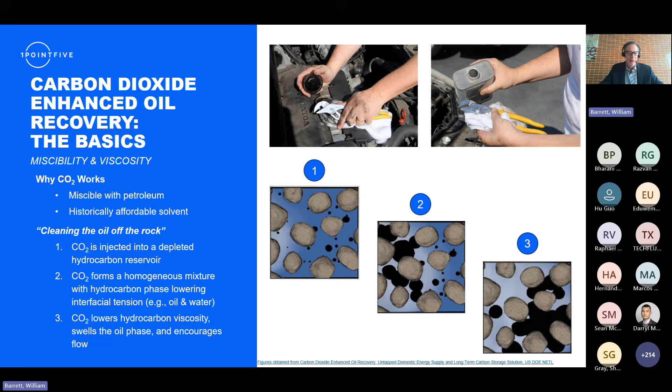It becomes miscible with the oil. It swells the oil. It allows the viscosity to be lower, and it actually flows. So now the oil that was trapped becomes mobile. And that's the slide here. So these are the four trapping mechanisms when you put CO2 into a geologic formation.

So the one that you'll always need to have there is a stratigraphic trap. Even though we inject CO2 in a fluid, not a gaseous state, it's buoyant, so it wants to rise, similar to the oil and gas. And so the oil and gas has been trapped millions of years. It's always because there is a seal there. And in this case, it's the cap rock that's impermeable. The CO2, the oil, the water, nothing flows through it. It's basically like a granite.

There's residual trapping as another mechanism. So the CO2, because of the wettability, is a new phase that's introduced into the rock; it's not been there before. And I will say, it's not injected into a cavern, right? It's injected into tiny pore spaces in a sandstone rock or a limestone rock that if you look at it, you would say there's nothing there, but it's actually like a microscopic sponge. And that's what we're trying to get the oil out of. So you have the residual trapping there.

You have solubility trapping because there's brine naturally in these formations. And so some of the CO2 will dissolve into the brine that's there. And the last trapping mechanism is mineralization. So over time, the CO2 actually becomes part of the rock. It becomes a carbonate. All of these are permanent and they all act no matter what situation you put the CO2 into a geologic formation. Those four are always there.

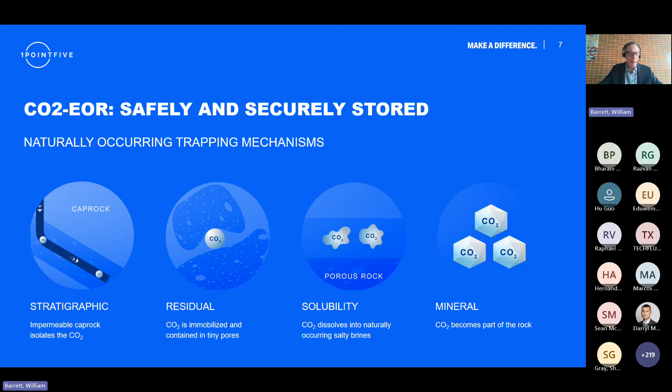The process overview, and I am looking to make sure I keep an eye on my time here because I could talk about this all day long.

But anyway, the CO2 is a closed loop system, right? We take this biogenic, atmospheric or anthropogenic CO2 and put it into the reservoir where it goes down an injection well, and this is the rock formation where it then travels through the formation and acts on the trapped oil that's there. It releases the trapped oil. In turn, the CO2 gets trapped in its place, and then we get the production. So we produce this fluid.

Now, generally, in dolomite carbonate formations, we will see that on the first trip through the reservoir, 60% of that CO2 will be produced again with the oil. And so 40% remains sequestered the very first trip through the reservoir. We then recycle that. So we separate the oil, gas, and the water. The oil goes to sales. The water goes back into the reservoir.

The gas then is separated because now we have the natural gas and the CO2 combined together. So we separate those out. The natural gas goes to sales, and the CO2 gets recycled as 60%. Now, the next trip through the reservoir, another 40% of that is sequestered. So each day we have to make up 40% of what we put in there. So as you can see, after a couple of trips through the reservoir, you've got 100% sequestration.

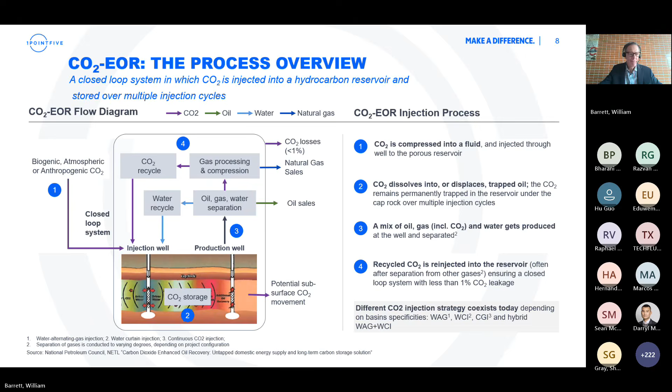Now, the history of CO₂-EOR in the United States: as I mentioned, this is not a new technology. The first patent for CO₂-EOR was granted in 1952, and according to the Texas Railroad Commission, between 1958 and 1962 were the very first enhanced oil recovery projects in the United States and Oklahoma. Now those were a lot of test cases, right? They were trying to make the technology viable. And so since then, it's been very well perfected.

So the first commercial project was in West Texas in Scurry County, and the field is called the Scurry Area Canyon Reef Operators Committee, or SACROC. And you can find a lot of information on this field in the literature.

The very first economic CO₂-EOR project. Now, after the oil embargo of 1973, there was more emphasis on domestic oil production, and so enhanced oil recovery then became more prominent. And so now, as of 2023, a couple of years back, there were 139 CO₂-EOR projects in the United States, producing 241,000 barrels of oil a day, injecting 2 BCF of CO₂ each day.

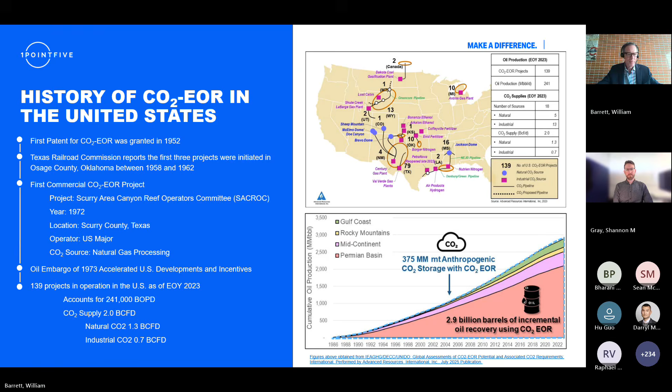Now, last thing I'll do here is talk about a little case study. And this is Oxy's operated Wasson Denver unit. Now, it's the Wasson field, and it's made up of several units. So the field roughly includes all of these units, and the Denver unit is the one that I'll talk about. It was discovered in 1936, and water flooding, which is an improved oil recovery mechanism where we pump additional water into the field to repressurize it, was started in 1960. And the CO₂-EOR injection, enhanced oil recovery, started in 1983, and it's still going on today in this field.

So the estimated amount of CO₂ that has been sequestered to date since 1983 is 775 million metric tons. We, back in 2015, were able to get the very first EPA, the U.S. Environmental Protection Agency's MRV plan, the Monitoring, Reporting and Verification Plan, approved. So that was the very first one in the United States, and it was for the Denver unit. The second one was also for one of our units in Hobbs, New Mexico. So we report annually under the greenhouse gas reporting, subpart RR.

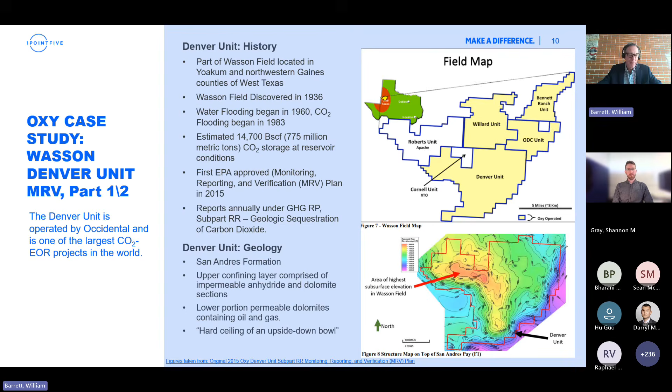So this just shows you the Denver unit's MRV performance. We started with one MRV for the Denver unit and expanded it to some of the other fields that are here. You see the Willard, the ODC unit, the Wasson ODC and the Bennett Ranch. So we expanded that MRV to include all of those. And the maximum storage space is 1,325 million metric tons in these fields. So you can see that it's a sizable amount of CO₂ sequestration potential there.

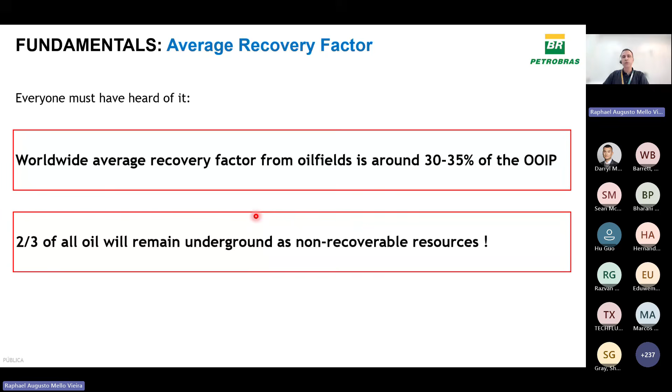So probably everyone must have heard about it. We cannot extract all the oil that we have on the ground. In fact, the average recovery factor, worldwide speaking, is something in between 30-35% of the original oil in place that we have, which means that 2/3 of all the oil will remain there as non-recoverable resources, right? We have many reasons for that, reasons related to the engineering design of the exploitation plan. For example, the number of wells that we can drill economically, the well spacing, well type, well location.

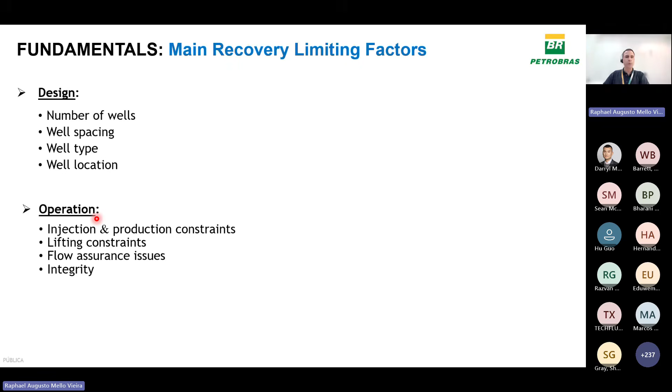We have another set of reasons related to the way we operate the fields, right? For example, how much water can we inject to push the oil towards the producers, as well as how much water can we produce and treat and overboard, right? And we have some causes related to nature. For example, rock heterogeneity. If the reservoir rock is more heterogeneous, it's harder to produce oil, right?

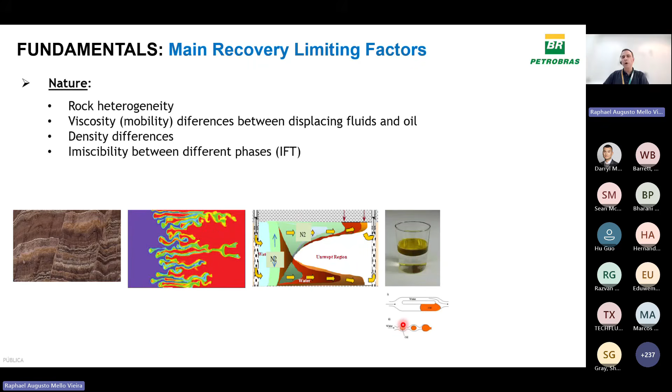If we have big viscosity differences between the oil itself and the fluids that we use to push this oil towards the producers, for example, water or gas, it's also harder to extract the oil. Density differences also have an impact. Immiscibility between phases is another natural cause, very important for us, because it is one of the main causes of oil retention in rock pores, right? And keep this one in mind because it's very important for CO₂-EOR, as William just presented.

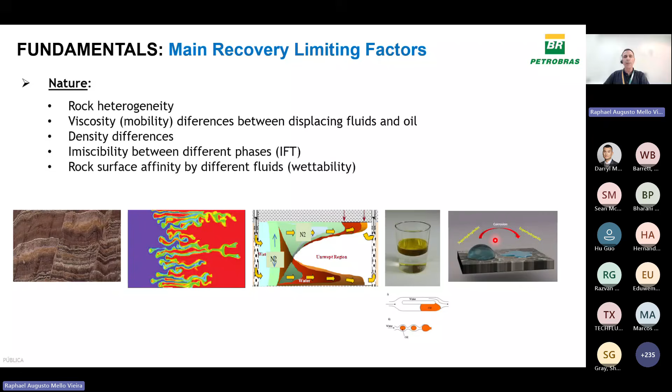And the last one is rock surface affinity by different fluids, what we technically call wettability. So if, for example, the rock surface has a greater affinity for oil, it's oil wetted, it's harder to extract the oil. We have some technologies to try to overcome these recovery limitations. We have the enhanced oil recovery technologies. These are special methods that we use to modify the physical chemistry of fluids and rocks to increase recovery at field scale, right? We are talking about field-wide methods here.

And we have the IOR, the improved oil recovery. That is a broader definition that encompasses not only EOR technologies, but everything else that we can do for recovery increase. For example, simply drilling more wells, something that we call infill drilling, is considered IOR. A special reservoir characterization, for example, using special seismic or tracer campaigns, is also considered IOR.

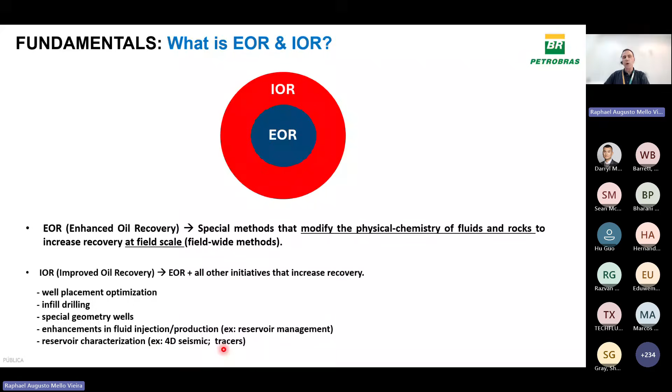Implementing EOR in a field is not something easy, right? Because these technologies are more complex, they are more uncertain, we have additional costs, they have longer payback times, longer qualification times. They compete with other technologies that don't offer the same benefit, but they are easier to implement, so they are the low-hanging fruits. And this bunch of technologies is more sensitive to risk and oil price.

It's even more challenging if you want to go offshore, especially ultra-deep offshore, because there we have larger reservoirs. So for example, if we are dealing with chemical EOR, we need to bring there a lot of products, a lot of chemicals, and it's not easy. They are offshore fields. We have fewer wells, we have irregular patterns, longer response times. It's harder to adapt the platforms to receive those EOR fluids that we inject, as well as the equipment that we need to do that. So we have retrofitting limitations on the platforms.

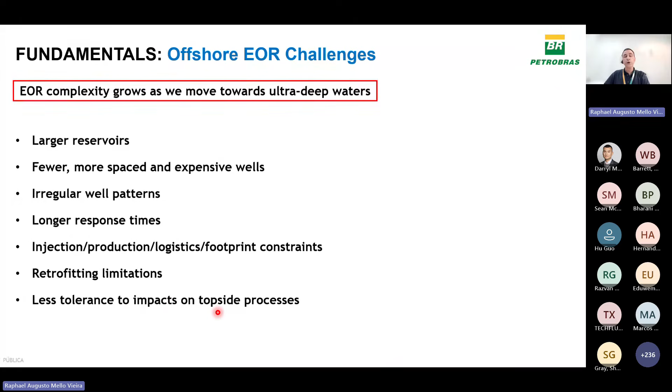And we are less tolerant to impacts on topside processes. For example, if I inject something that, when we produce it, is going to harm our oil-water separation process or even the water treatment process and overboarding, it's a problem. So it's key, if I want to implement EOR offshore, to think about it in advance.

We have many EOR methods. If we look carefully, each one tries to attack one of the natural causes that I just mentioned. For example, if I put polymer in the water that I inject, trying to viscosify this water, what I'm trying to do is to approximate oil viscosity and water viscosity, right? But here today, we are interested in gas-based EOR, especially CO2 EOR, and what we are trying to do is to attack that immiscibility that I just mentioned, because as William told us, gases, especially CO2 at very high pressure, become miscible with oil. So I eliminate those causes of oil trapping.

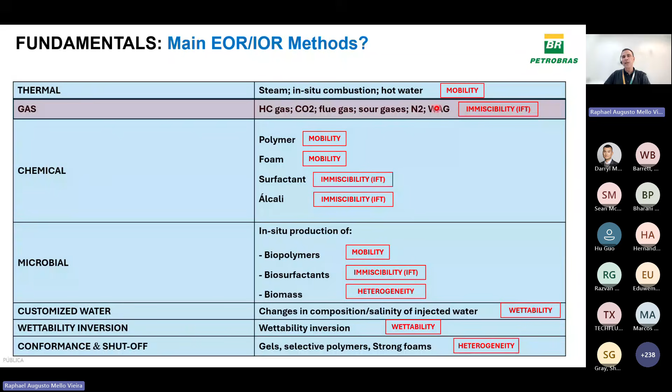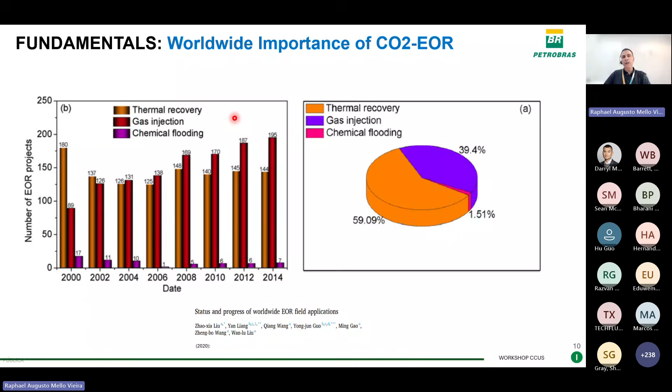CO2 EOR is very important. Historically, it is the second most applied EOR technology, just loses to thermal EOR, which means that for us, oil companies, especially in the upstream business, the U from CCUS, the utilization, means CO2 EOR. And since the 70s, the 50s, right? For a long time, we know how it works and we apply it.

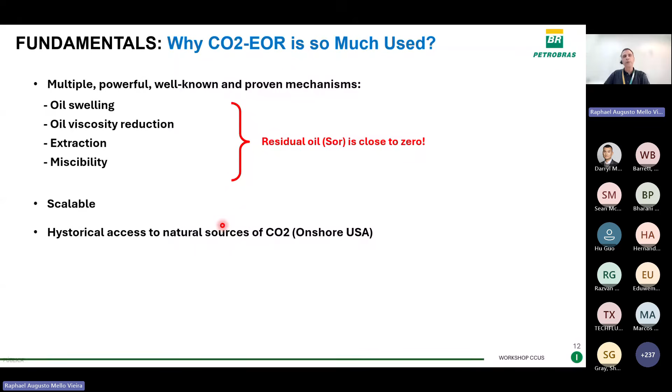Reasons for using CO2 EOR that much. First, we have multiple powerful and well-known mechanisms. These mechanisms, oil swelling, viscosity reduction, extraction, miscibility, can reduce SOR, that is residual oil saturation, the oil that becomes trapped in the rock pores, to almost zero, where gas effectively can contact this oil. It's something scalable as far as we have access to the gas, to the CO2. And historically, we have had access to these sources of CO2, especially onshore USA, as William showed us. We have natural sources of CO2. So that's one reason for the great use of CO2, worldwide speaking.

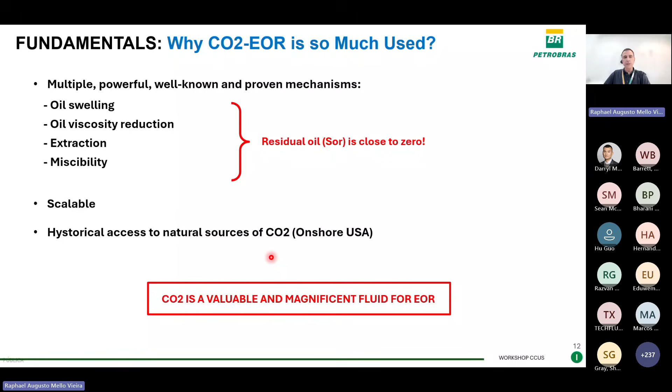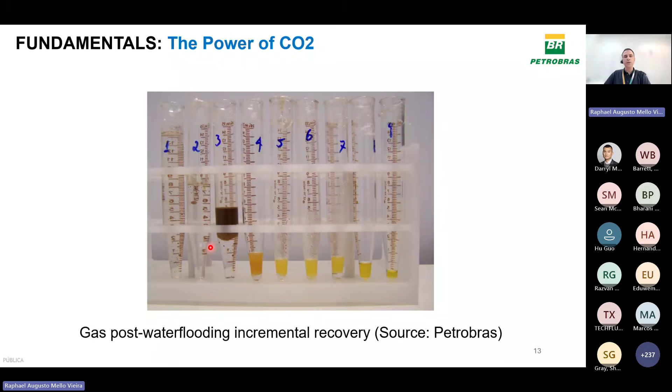So one important message here: CO2 for us, from the recovery point of view, is not a problem, it's a solution. It's a valuable and magnificent fluid for EOR. We can have an impression about the power of CO2 if we perform very simple lab experiments. For example, in this one, we had a piece of rock fully saturated with oil, and we injected water up to ceasing the oil production. So in these first test tubes, we see that we injected water and it produced just water, right? We just circulated water here. We were not producing oil anymore. As soon as we started injecting CO2, the oil started to show up again by all those mechanisms that I mentioned.

But life is not a bed of roses. We have issues too. And the main one is related to gas's very high mobility in the rocks, right? Gases, even at high pressures, have very low viscosity. So they tend to pass through the most permeable pores of the rock. That's what we see in this micromodel experiment performed by Heriot-Watt University. Here we see the CO2 bubbles flowing very quickly through the most permeable pores, leaving a lot of oil behind, right? So gas can extract all the oil where it contacts this oil, but it doesn't sweep the rock very well. We have ways to overcome this issue.

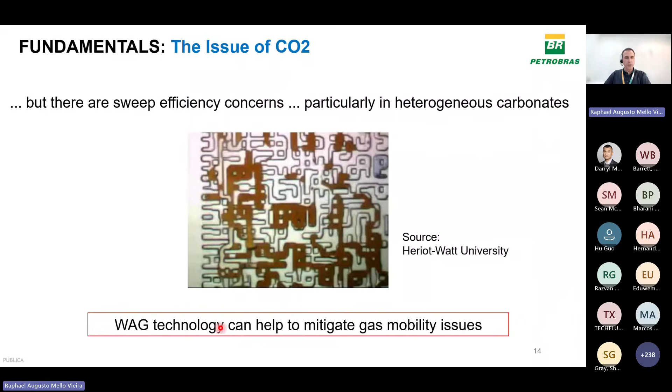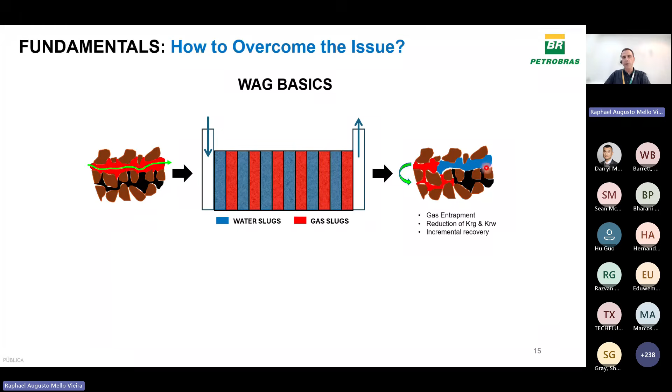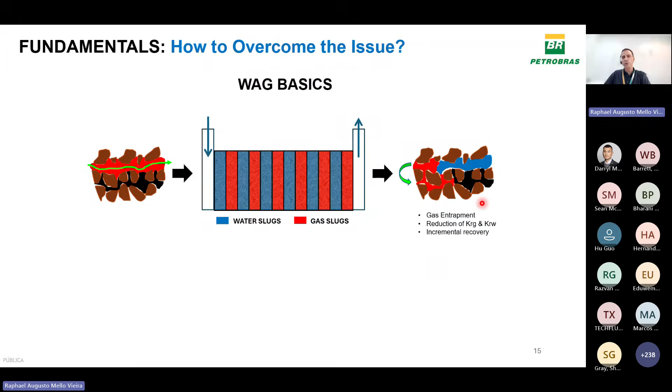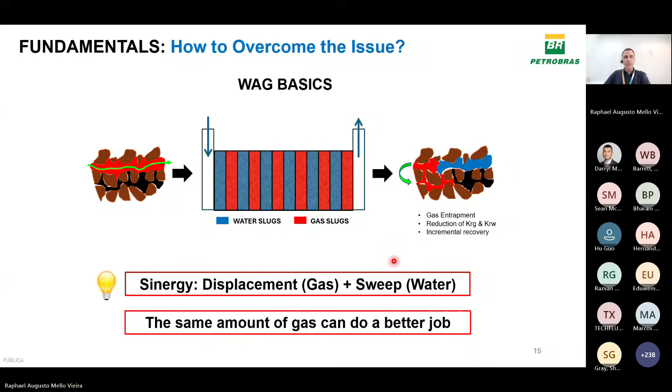One of the ways is to implement WAG technology. WAG means water alternating gas. What happens is when I alternate water cycles with gas cycles, this water blocks the preferential pores where gas was passing through, causing gas diversion and the production of oil from these adjacent pores. So simultaneously to increasing the oil production, we also have gas entrapment, right? So here, by performing WAG, I have a synergy between the better displacement efficiency of gas and the better sweep efficiency of water. In other words, the same amount of gas can do a better job.

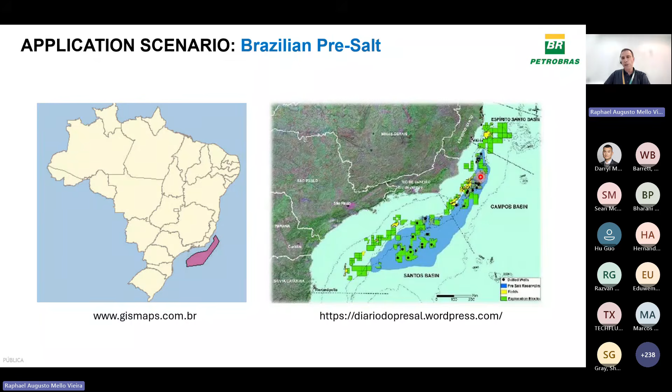Now talking a little bit about the application scenario here in Brazil for CO2-EOR. It's the pre-salt basin, located in southeast Brazil. There we have some big and giant fields. They are carbonate rock fields that possess light oils and a huge associated gas content. We have a lot of gas dissolved in this oil. And one particularity, this gas is contaminated with CO2. Contamination can range from a few percent up to 45% molar of CO2 in this gas.

Petrobras and its partners, since the beginning, decided not to vent the CO2 into the atmosphere. We decided to reinject this gas. By doing so, we could join environmental compliance with improved gas management and EOR. Gas, as I told you, is a very good extractor for oil, a very good solvent for oil, let's say. And here we have favorable conditions for gas injection. For example, we have high pressures, we are talking about 6,000, 7,000, 8,000 psi, low temperatures from 60 to 90 Celsius, light oils and CO2. So we have favorable conditions for miscibility.

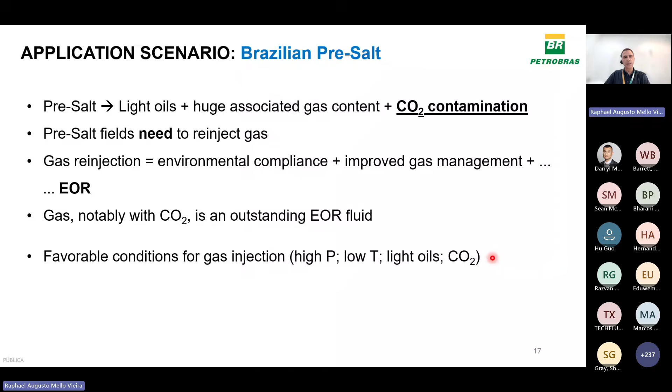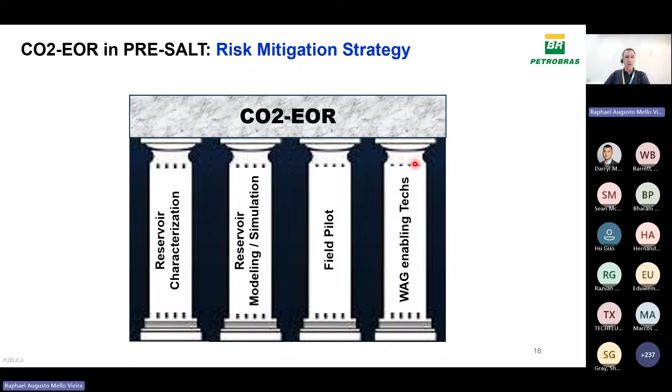CO₂-EOR is not something new, as William told us, but it's not very usual to do that in an offshore environment, especially ultra deep offshore, right? So we had risks involving this application. To mitigate those risks, we tried to implement a risk mitigation strategy based on 4 pillars: reservoir characterization, reservoir modeling and simulation, a field pilot, and the development or adoption of some WAG enabling techs.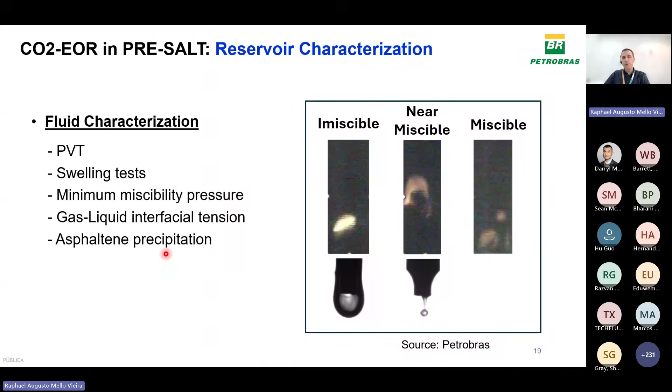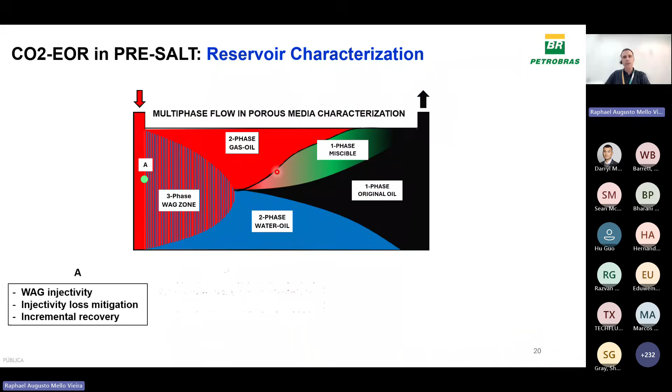Regarding characterization, we performed a very broad fluid characterization program involving not just the standard PVT tests, but also some special tests related to CO₂-EOR: swelling tests, minimum miscibility pressure tests, interfacial tension tests, and asphaltene precipitation evaluations, right? We also performed a broad multi-phase flow in porous media characterization, investigating those zones that are not usually investigated in normal waterfloodings. So we investigated experimentally the WAG three-phase zone, the two-phase gas-oil zone, the miscible zone, right?

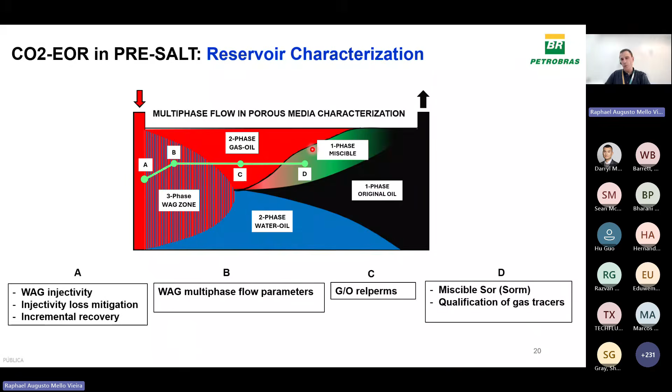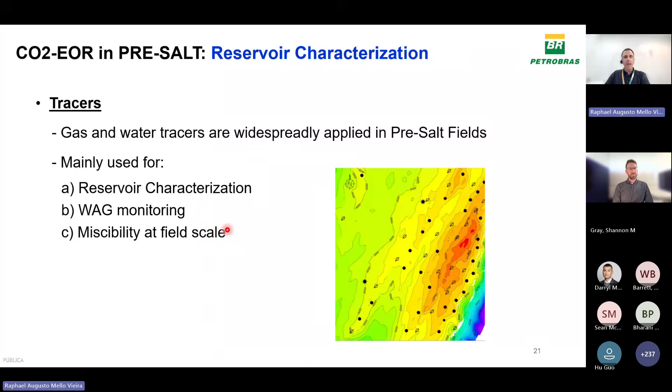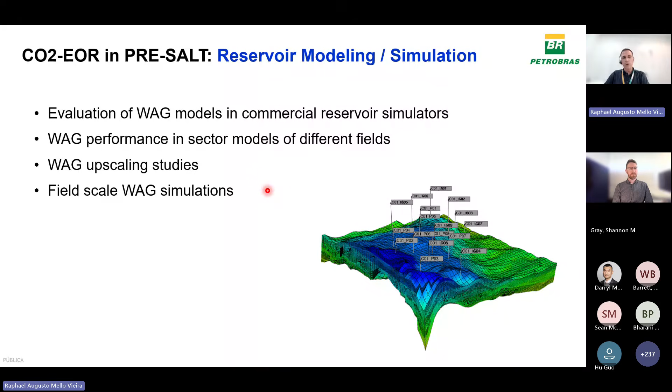In the field, we implemented a very broad tracing characterization program involving gas and water tracers, mainly to better characterize the reservoir, to monitor WAG cycles, and to detect miscibility at field scale, right? In terms of reservoir modeling, we started evaluating the models that we have available in commercial simulators to see if they fitted the phenomena that we wanted to represent. Then we started performing some evaluations in sector models, upscaled the parameters, and finally performed the field scale WAG simulations.

In terms of enabling technologies, those technologies that we need to bring that application to the field in reality, we adopted or developed CO2 separation by membranes, gas drying by molecular sieves, adopted intelligent completion in order to inject the gas where we wanted to. We installed simultaneous gas and water manifolds in the field, which brings a lot of flexibility.

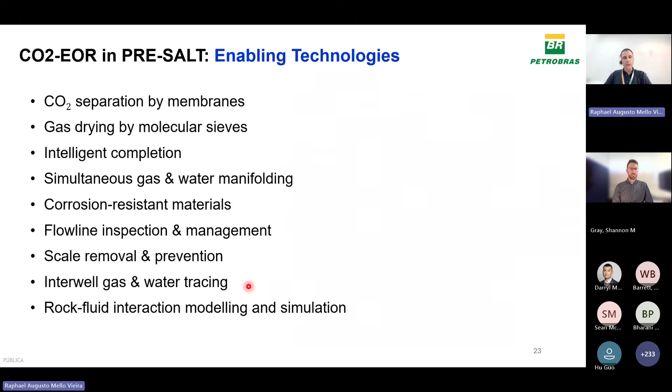We studied the corrosion and adopted corrosion-resistant materials, adopted a flow line inspection and management procedure, because here we have a problem that we call stress corrosion cracking. You probably know that CO2 in contact with water is acidic, so we have corrosion issues. Scale removal and prevention, because carbonate rocks are more reactive, especially when we have CO2 and water. So we need to adopt scale removal and prevention procedures. The gas tracing and water tracing that I just mentioned, and rock-fluid interaction modeling and simulation.

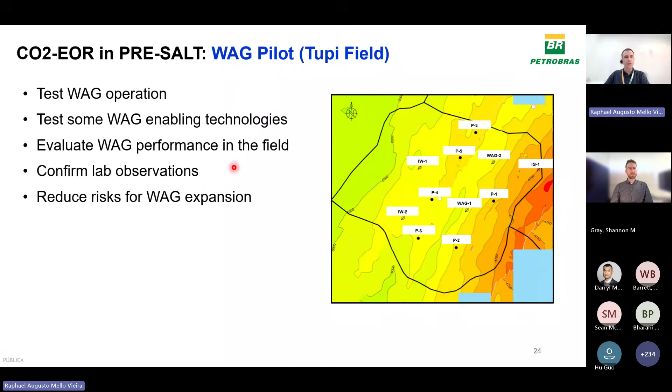Regarding the pilot, it was done in Tupi field here in pre-salt, mainly to test the WAG operation, the cycling, if we would have some problem, test some WAG enabling technologies, evaluate the performance in the field, confirm some lab observations, and reduce risks for expansion. The results were good in such a way that now we have expanded CO₂-EOR and WAG to 10 fields here in pre-salt, involving 70 wells, and we have so far done more than 200 fluid switches successfully. We have stored, re-injected, in fact, 70 million tons of CO2.

Tupi field, as I told you, was the pioneer and is considered one of the biggest offshore CO2 EOR injections worldwide. And our average estimated benefit is around 1–2% units over continuous gas or water flooding in dedicated wells, right? In literature, we have a little bit more, like 10%, but remember we are offshore, just a few wells, just dealing with associated gas. So this amount is more modest, but for our giant fields, 1–2% is a lot of oil, a lot of money.

Now the way forward that we see for the application: we intend to further improve WAG performance by optimizing the cycles and adopting additional gas mobility control technologies over WAG, expand to new pre-salt areas, and we see offshore CO₂-EOR as an enabler for future CCUS and CCS projects. Maybe in the future we can use more CO2 in these fields as this fluid tends to be more available. And maybe we can boost CCUS projects with carbon credit revenues in the future.

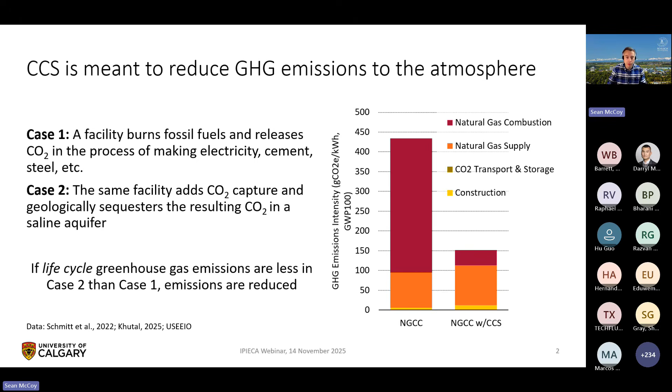But the point here is that we have this big emissions reduction, sort of like 65%. And that's the benefit of CCS, and that's what we want to see happen through CO₂-EOR. But of course, we have to think about this from the life cycle.

So if we look at the life cycle of the example I just gave, this is for electricity generation, and that's a simple one, because we produce a product that has no carbon associated with it in its use. We don't burn it or anything. It's pure energy. And we have to look at the production chain, from production through processing, transport, and eventually that generation of electricity. And that's what's known as the cradle to grave life cycle.

And inside that is the CCS component, or the geologic storage component. So if we extend that to EOR, and we think about what William was saying, the origins of EOR in the United States, where CO2, and even today, a large portion of the CO2 used to enhance oil recovery is coming from natural accumulations, right? That goes through transport, that large pipeline network you saw on the map, through use in enhanced oil recovery, which we've heard quite a bit about in the technical operations of it.

And then we produce that oil, gas, and natural gas liquids. That's the benefit of this whole process and why we would be doing it. We transport that to the refinery. Those refined products and petrochemicals are eventually distributed and used, right? And supporting the life we have all around us today, transportation, plastics, various petrochemicals.

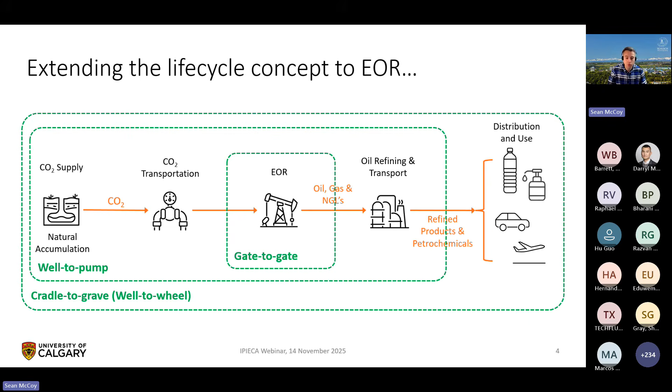And so we could think about that from several different perspectives. We could think about this from a gate-to-gate perspective and look at just the emissions from that one component of the system. We think about well to pump, and many of you might have heard that term before when we think about carbon intensity of fuels. And then we think about, again, the cradle to grave on this, and we're putting everything in there, including the end use of the products. Okay, and in the fuels area, that's often referred to as the well to wheel carbon intensity.

So if we want to put EOR together with some other production route to reduce emissions, we have to look at these two parts of the life cycle and connect them. So we have our power generation component. That makes sense. We've looked at that. We have to capture, transport, and use that CO2 in EOR. And so now we have an EOR life cycle.

And where this gets interesting is we now have two different sets of products that result, right? One is whatever we set out to make in the initial case, whether it's cement, steel, fertilizers, electricity, as in this example, and those products. And so now we want to look at the cradle to grave impact of everything happening here. And why do we care about that? Because that's what the climate cares about, and that's what we're trying to address here.

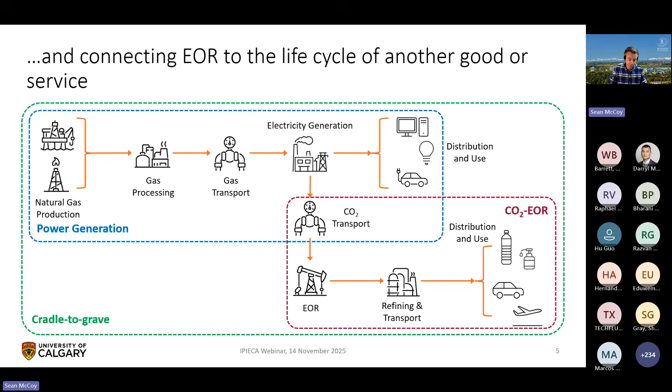So let's try to look at the question of, could CO2-EOR then reduce emissions across that cradle to grave life cycle? So I'm going to work through a little bit of a thought experiment here, okay? And so I'm going to talk about something first called a marginal system. And in this marginal system, I am producing oil as I would. Let me get my slide to move forward here. There we go. Okay, I'm producing oil as I would today, somewhere in the world. We'll say that's Saudi Arabia, because maybe Saudi Arabia or maybe a US tight oil producer or something like that might be on the margin of the market today.

If I then add carbon capture and storage, I'm going to reduce emissions, right? Because I capture carbon dioxide that eventually goes to an EOR project. And because enhanced oil recovery is quite energy intensive, as has been alluded, we have lots of recycling and compression that happens. We have some increased emissions because of that switch to EOR. But the net is that I have fewer emissions than I would if I was just producing oil and burning gas for power.

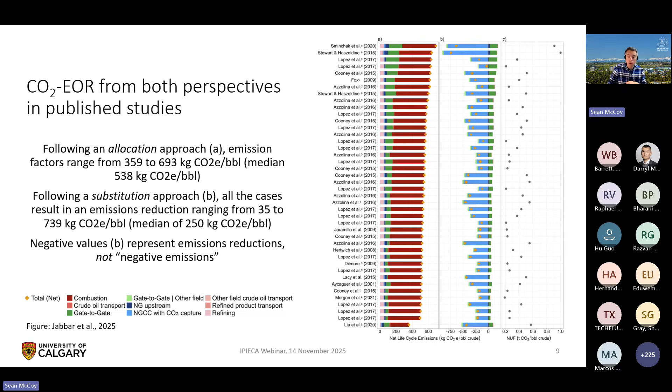And if we think about a substitution approach, right, where I'm explicitly trying to look at how barrels of a marginal system might be displaced, we can find emissions reductions that range from 35 to 739 kilograms CO2 equivalent per barrel. And that's shown on these two panels with the allocation approach and the substitution approach. And I just note that these negative numbers here denote a reduction, and they are not to be thought of as negative emissions.

So could projects do better than this? Absolutely. We know that we have a lot of compression energy, and if we do natural gas liquid separation, energy that goes there for these projects. So if that can be done more efficiently, great, that is a benefit to emissions, and we can also seek out decarbonized electricity for these processes. We know that across oil and gas systems, venting, flaring, and fugitives aren't always well tracked.

That's, of course, improving, but EOR projects should really measure and report venting, flaring, and fugitives much more than they do. And finally, we could actually talk about engineering the projects differently and think about how you could increase net utilization. And from that emissions reduction perspective, you're using more CO2, you're storing more CO2, and effectively you can get more CO2 stored for every unit of product that you would produce in the system, which could be beneficial.

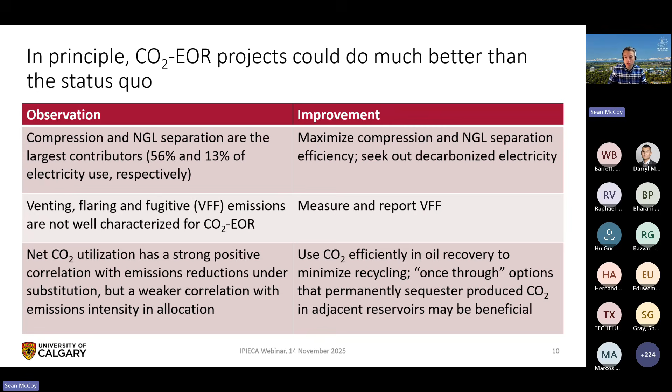So I guess I'll wrap up with just a few take-home messages: I think indeed CO₂-EOR does have that potential to reduce emissions, but there is always a baseline question that people can have disagreements over. But we can always do an allocational approach to compare barrels, and it does show that you can generate some low emissions products out of the system. And there are practical ways to reduce emissions from these projects, and what would be great is to have more data so that we don't just have to rely on sort of academic studies.